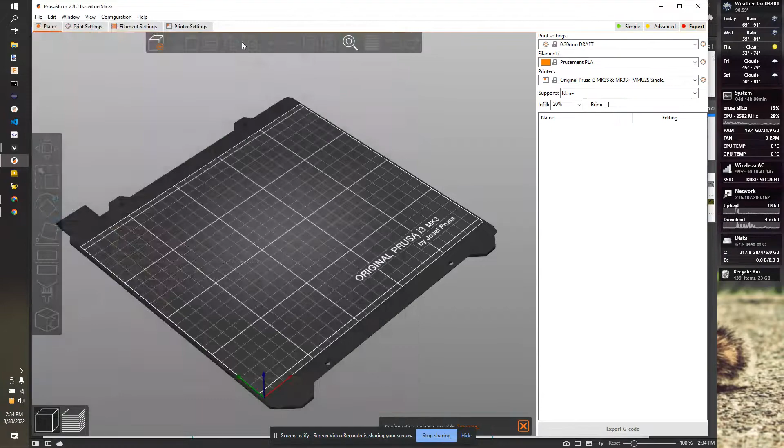I'm now going to add an object using the cube plus button. This cube plus button will add an object. We'll add the cat.

Now, in PrusaSlicer, I can zoom in and out with my mouse wheel. I can right click and drag to orbit, or left click and drag to pan. So now if I look at this, this is our printer bed, and there's the object.

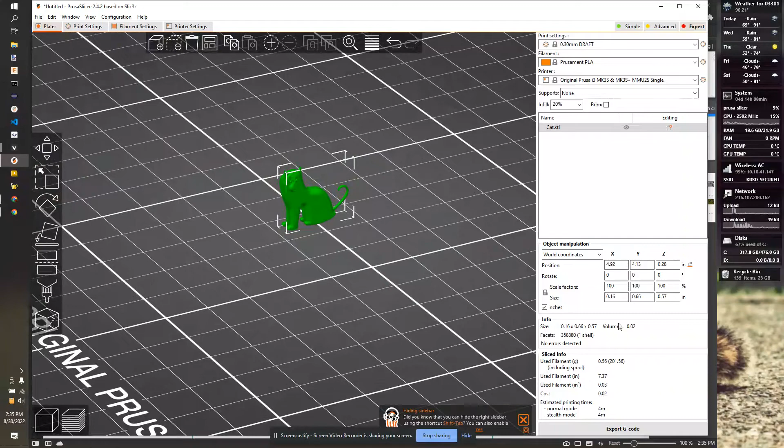So that's 4 minutes, but our size is half an inch tall. If you look at it, this is tiny. And even if I bring our quality up, that tail doesn't look good.

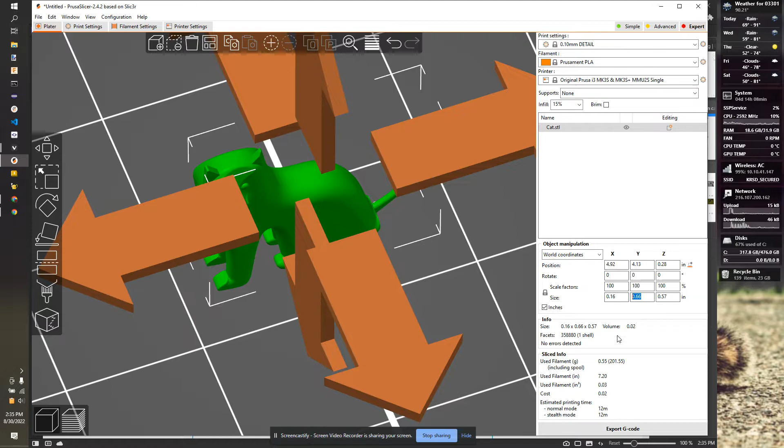So one option is to make it bigger. I can go to my scale and do a scale factor like 200%, or pick a size. I'm going to make this 2 inches tall. Now, if I go back to my preview, that looks solid.

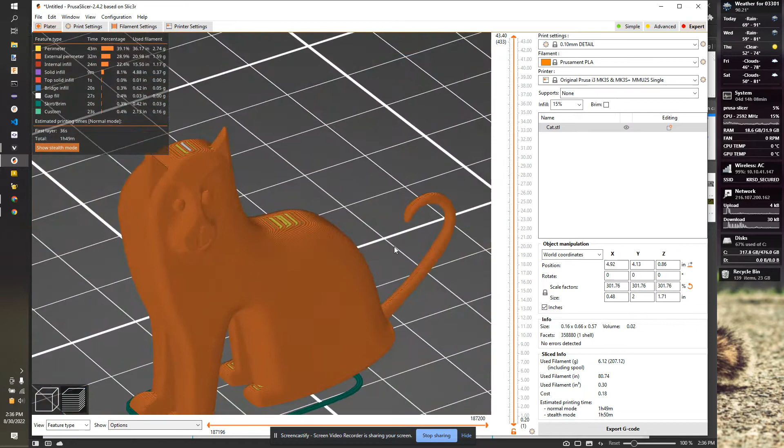Now let's look at this cat. The first thing I'm noticing is that his chin hangs over nothing, so I'll probably get a little drooping there. But there's a bigger problem, and it's the tail. If I look at this tail, there's a huge problem: this point here is lower than any point above it.

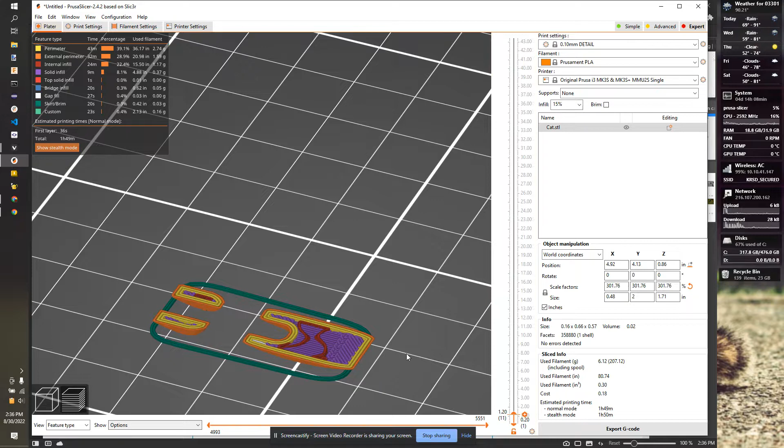What I mean is, if we go through the model slice by slice, this drops down, look here. So our first layer doesn't look good. There are only 2 little dots here for the paws, and then a small one for the butt. And it builds up, so these paws are almost nothing holding onto the build platform.

So I could do supports, build platform only. And now I have some support there.

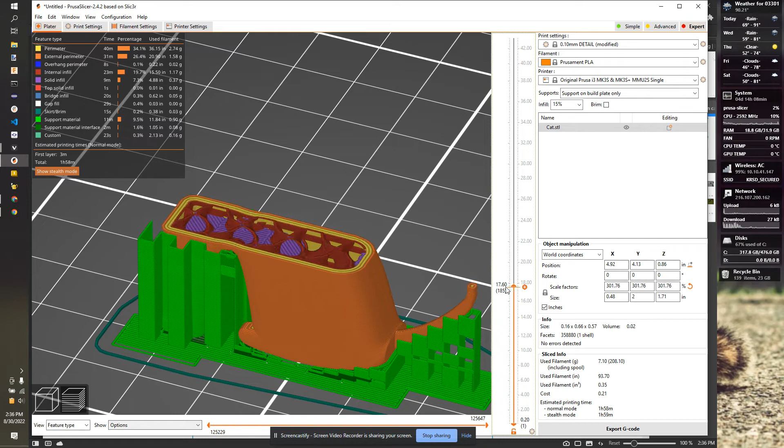Now let's walk through. It's going up, supporting the tail, everything looks good. But all of a sudden, this dot right here comes out of nowhere. This dot has to be drawn in midair, and that can't be done.

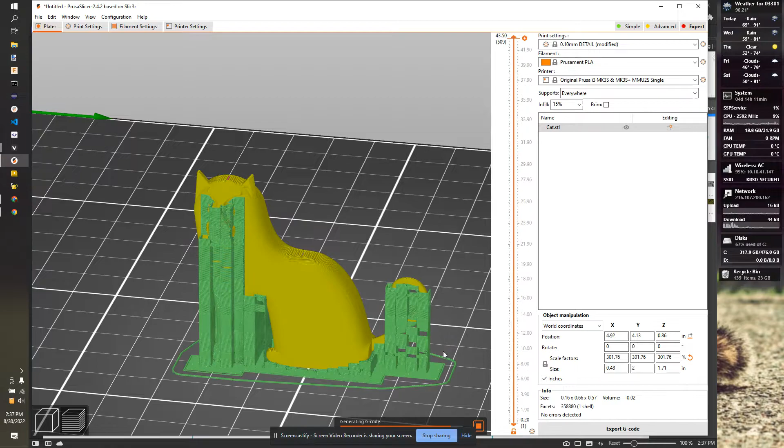I could go and change my settings to supports everywhere, but now I'm going to have to remove that support without breaking the tail, and that's going to be almost impossible. So this model is not great for printing. It's not a good model. So we're going to delete that.

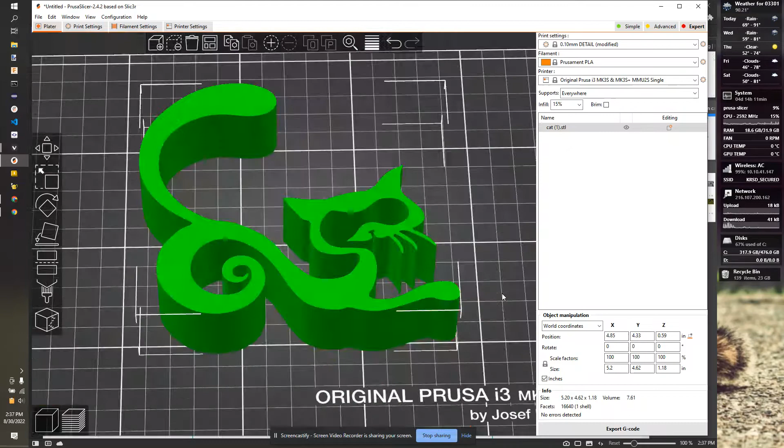Let's look at our second model. So our second model - nope, wrong one. Here's the second cat. Now, our print time is 12 hours.

So let's turn the quality down to 0.3 because all the walls are straight up and down, so there's really no point in doing a higher quality. Sometimes you get a smaller bead with those settings, but we're still at 3 hours. This is kind of big.

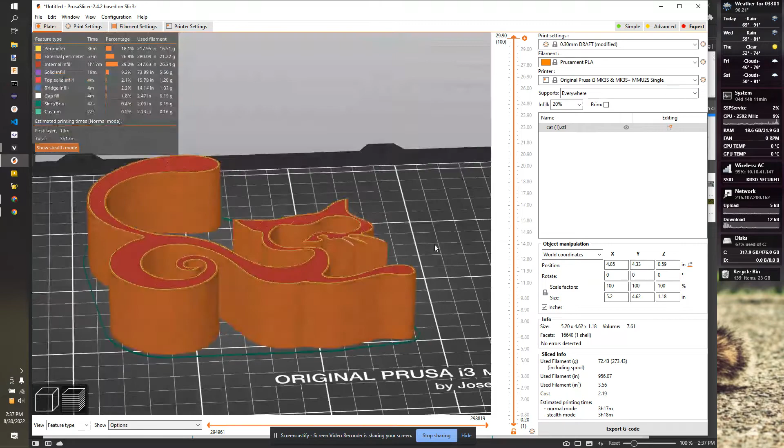So it's 5 inches by 4.5 inches by an inch thick. So I had a couple options. If I want it big but just take less time, I could scale the whole thing down. So let's make this a 3-inch maximum size.

And look at it, the whiskers still look good. That looks okay, yeah, that looks fine. Now we're down to 1 hour and 4 minutes.

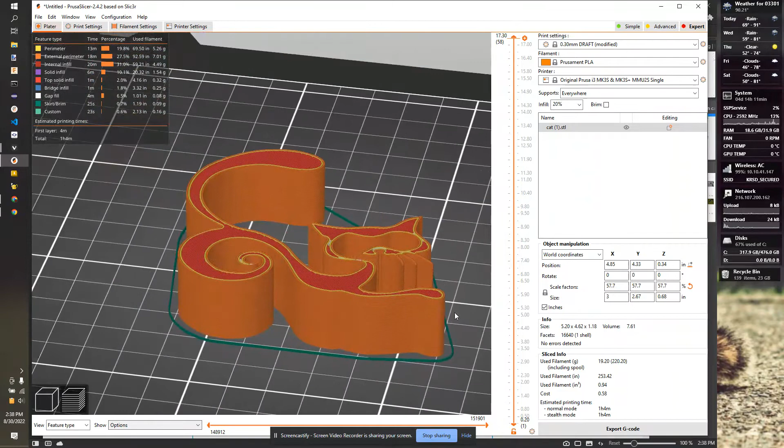Another option: if I go back to my model view, I can undo. Instead, I can unlock this and make it maybe just a quarter inch thick, 0.25. So now it's less tall, but still scaled in the same direction.

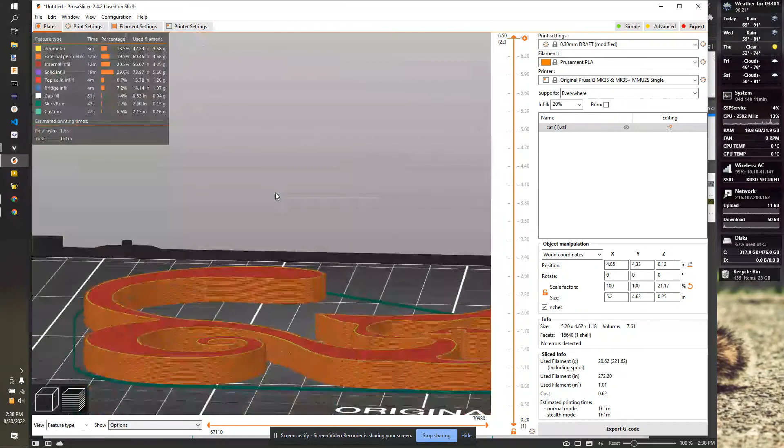And I have it at 1 hour, but it will be bigger and just flat. The slice view isn't going to show me very much because it's pretty much just straight up and down. The first layer looks fine, and it just builds straight up from there. So there are 2 options to make that acceptable.

If I'm happy, I can hit export G-code. But I'm going to wait because I'm going to show you one more possibility, which is the flexible cat, and I'll do it in the next video.